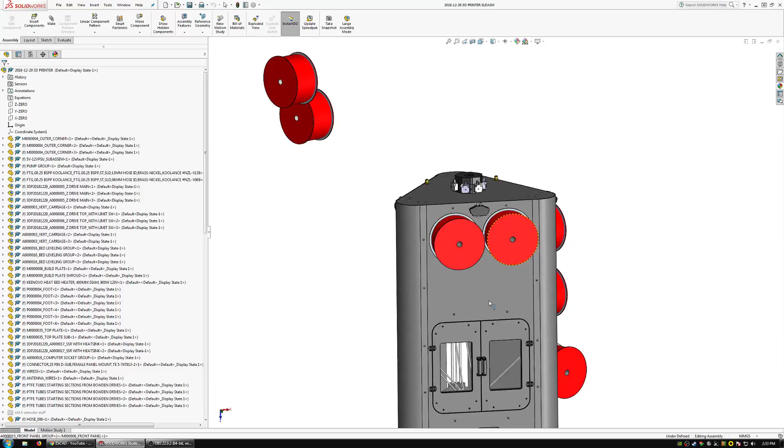Basically, this is a 3D printer I'm working on. I'll go over the features later, but the idea is that this should be a no-compromises printer that lets you create pretty much whatever you want to design—relatively fast, relatively reliable, without a brand name that makes it cost 10 times too much and uses DRM on filament. Not naming any names. This is going to be open source, and if I could get some community involvement, that would be great. If not, I'll just make it myself and open source it anyway.

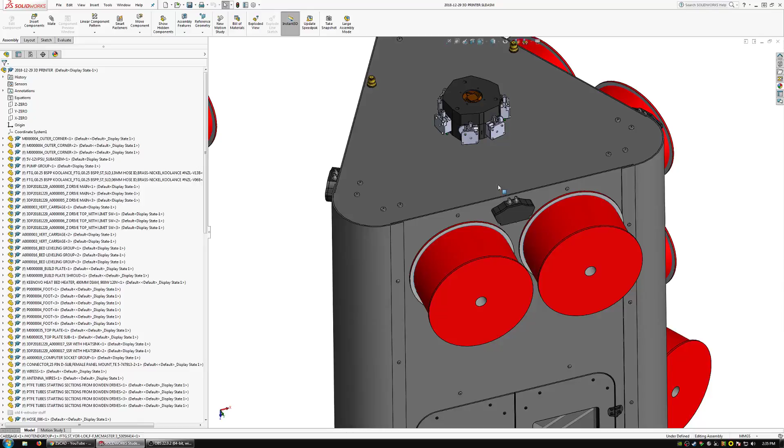Quick basic thing: this has 6 extruders, and inside we have a delta arrangement with 6 hot ends. So we can have 6 different materials—for instance, 5 different colors of ABS plus a support material, or a part that's ABS, Ultem, and nylon plus support material, and you're covered for some pretty complex designs. Even with just the color options, it allows you to design things and print them without having to paint features on afterward.

A lot of design has already happened here. Next step I'm looking at: we have the carriage with the hot ends, fed by this extruder group with the motors inside. I need to add some vents or something to this, but that can wait. Those feed from the filament-out detectors, which just have filament rolling through. Actually, I just realized this one is mounted upside down, which means they all are, so I'll have to adjust that.

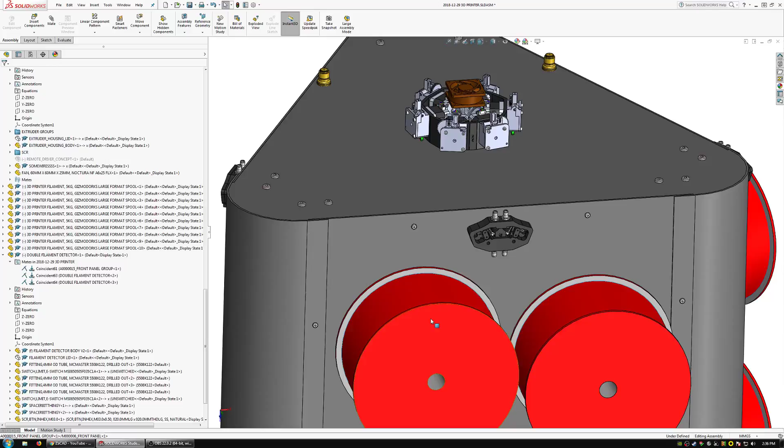It's feeding off these spools, but as you can see, I don't have anything for the spools yet. I've got an idea, so that will be what I work on today. First I have to put these in at least roughly where I want them, and that will let me figure out the spool placement. I just want this one parallel and the other parallel, with all the others facing the same way. Looks good. Since I hid some bits, I'm going to show them again.

This has 3 screws to attach it—I could probably get it down to 2 if necessary. I'm going to hide this, and I think the best place to attach it would be to put those screws right into there and tap this aluminum beam. Just have to see if I can get all 3 in there; this area is relatively low, but I might as well get all 3 in.

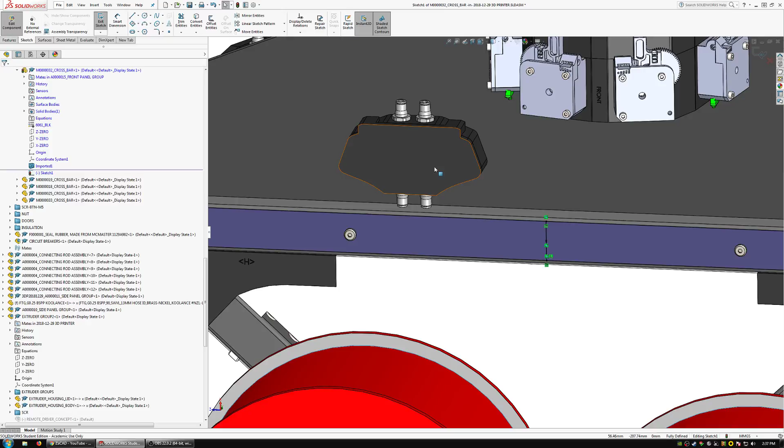I'll start a sketch over here and convert this whole face, so I can get the center of it. That dot is the very center. If I do a convert entities on the inner loops, then we have that pattern stored inside this part. So we can open this part and work in that sketch without everything else being in the way.

I'm basically just going to copy this pattern out. So I made a pattern that I can copy, and I can just do a copy.

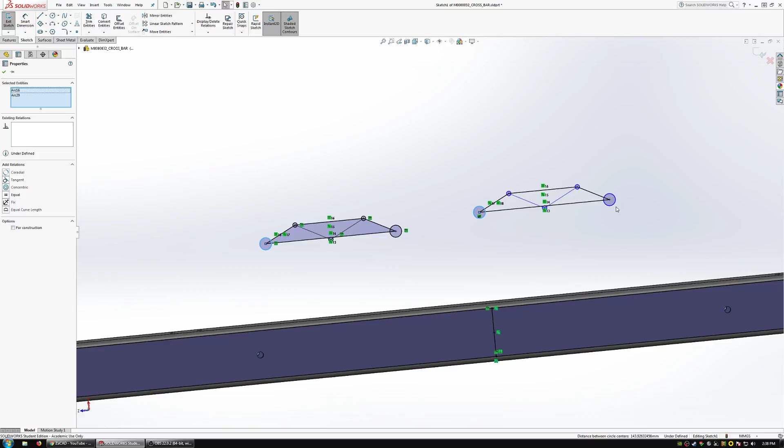Parallel, equal, parallel, equal—I'll just fix one point so I know when I'm done. It's going to be equals. What are these three? We want those to be smaller, but we'll make them all equal. For tapped holes, I just make them at the actual tap drill diameter, and I want those to be equal as well.

So that's fully defined. If I remove that, okay, now we can center that. I'll make a rectangle around it to figure out what I'm actually using here, with some tangent mates. That rectangle is the overall outer size, so if I do a midpoint right there, I just need to hide the rectangle.

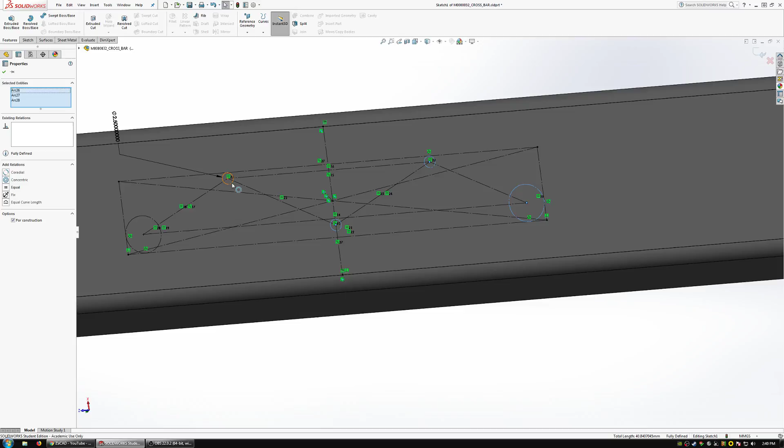For construction, I need to hide this, and hide that. At that point, all I should have left is these holes. Let me just turn everything to construction and select just what I want. Now I should be able to do a cut—10 millimeters, that clears. I'm going to break the external references, since they were basically just there to give me that pattern.

Okay, and now I've got that pattern on that beam. Now I've got two other sides, and they do have different part number beams because, while it's roughly the same all around, there are minor differences.

Just gonna completely hide the triple one because that was kind of a silly idea. It didn't really pan out because of trying to line up the filament in an efficient way. It just didn't work, especially if I want to have an enclosure around it to keep it relatively dry.

Okay, so I have this bar. If I just copy and paste it over here, looks like it's got the three holes from that last filament out detector with the triple one.

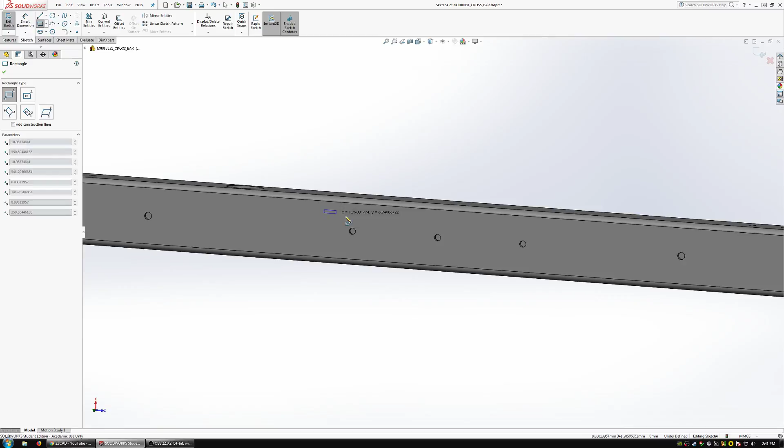So we'll just cover those up. And they're gone. I know that's very sloppy.

I don't care, it's my project, and if I'm ready to actually release this stuff, I'll go through and make it all good. But I find that a lot of times in design, you get so many changes and so many parts that you end up modifying over and over again, and they end up getting huge.

So it's just better to work with what you got. Don't really go back and fix things, just make it look right and the right size and dimensions and everything. And then when you're satisfied with it and it's all set, then it's time to fix it and make it look good.

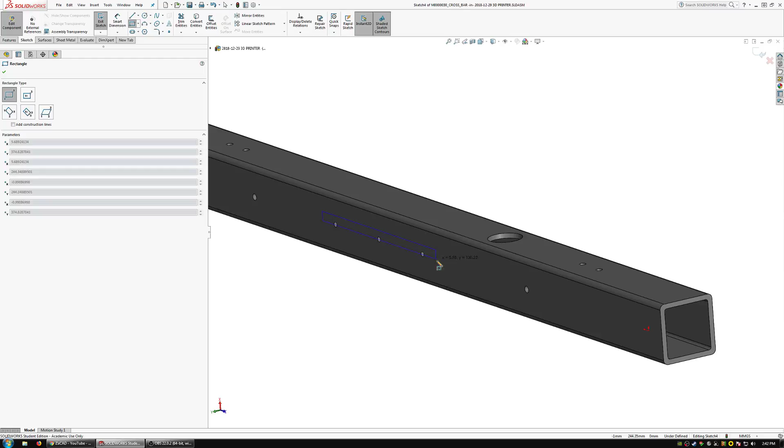Alright, so this one also has the same issue. Just gonna fill in these three holes. Okay, that's good. Then show this, and I'm gonna copy this one.

And just made it the same way I did the previous ones. These are all the same length, and I want this to be in the center of all of them. So I can do that pretty easily.

So even though I'm working this part, I can still sketch on this plane. It doesn't really matter at all.

I'm just going to cut up to next, and that should cut the pattern through. Yes, it did, but not up to that one.

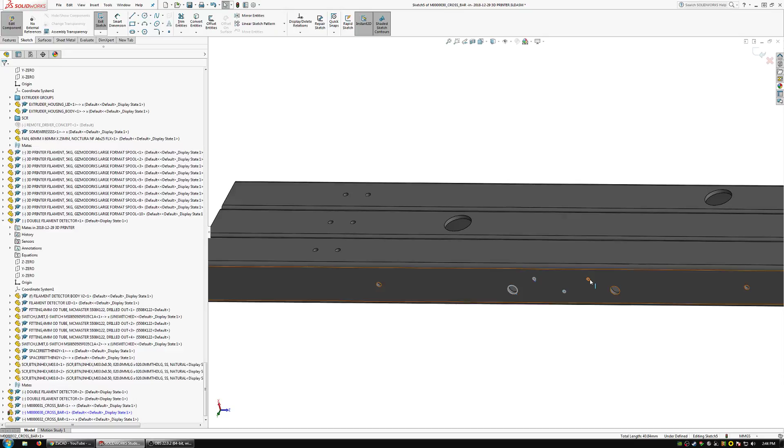Okay, and then I just need to edit this one. I'm going to do the same exact thing. To next, sounds good.

And then I'm going to break those references because it's just a pattern. And I like breaking references anyway because SolidWorks can get a bit choppy when you've got external references, and it really slows things down as well.

Alright, so we can get rid of these three because they were just there to transfer the holes. So now I've got the holes there, and holes there, all the same pattern.

Gonna show everything again. And I'm just gonna get rid of these so that they stop popping in because I am not going to use them. I'll just suppress them just in case I decide to change my mind later.

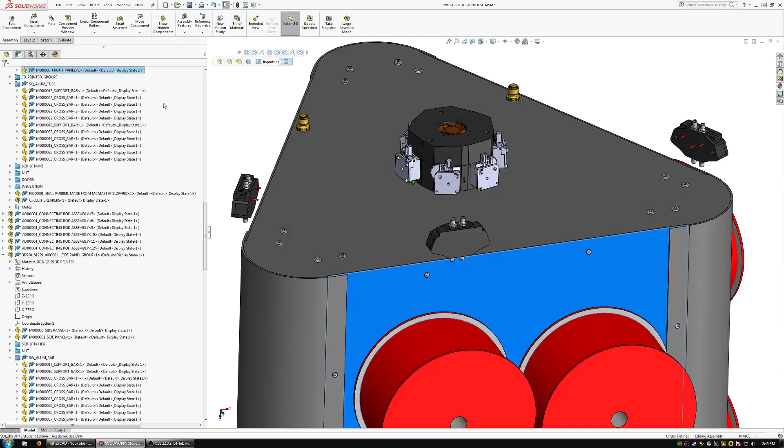At least when I show everything, they won't pop in again. Alright, so now I need to add that same pattern to here.

And how I'm going to do that is, actually, hide this first. Then create a sketch and go back to that, get those holes. Just going to convert them and do an extruded cut through all. And that's set.

Over here, I'm going to do this panel as well. Again, I've got holes to patch, so I'll just do those real quick.

So much easier than removing drill holes in the real world. And again, we'll just copy this sketch out of the cut, and through all.

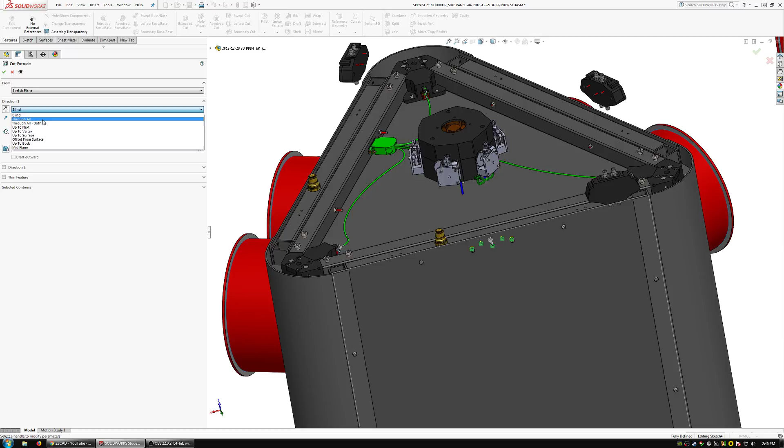Okay, one more to go. Alright, so that's patched. Then we just need to copy the sketch one more time.

Okay, gonna list all external references, break all. And just because that was a lot of external references, breaking and all that, I do a Control Q to do a full rebuild, and then I save. And save.

Alright, so now I can start attaching these. And that's fully defined, good deal.

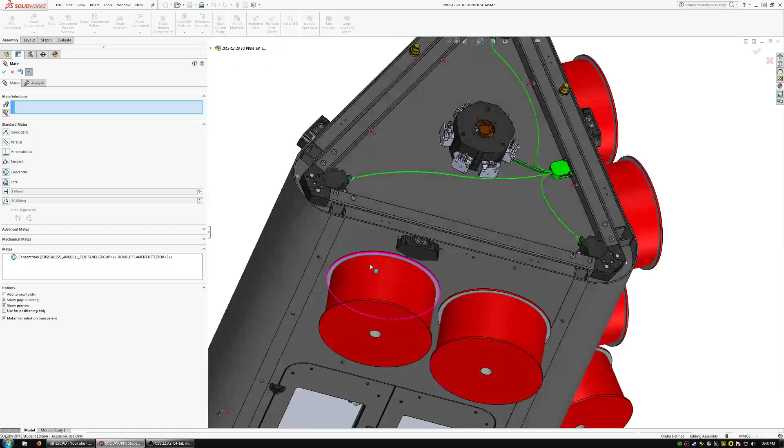Just kind of pull these off the edge so I can actually get at something to mate. And there we go. And one more.

Okay, now one minor issue I just realized is that those holes we just made are at tap drill size, which is fine for the side, the parts that are actually supposed to be tap drilled. Actually, we don't want to hide those.

Edit. Okay. So, just gonna hide all the filament detectors.

Okay, so then I can go in and change this to be 3mm holes here. So these are just through holes. That way I'm not trying to thread into a panel.

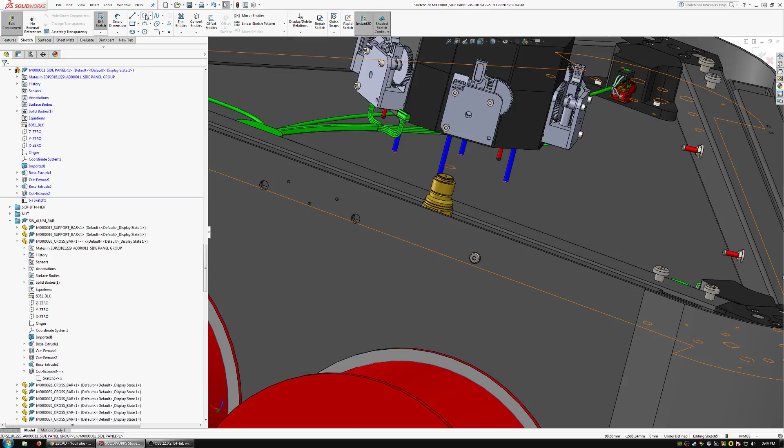And yes, this will break some mates, but yeah, we can make them again. And sure, I could just modify the sketch, but this works too.

And yeah, when this is all ready, it's just going to be step files anyway, so it doesn't matter how they got there as long as they're right geometrically. And one last set to expand.

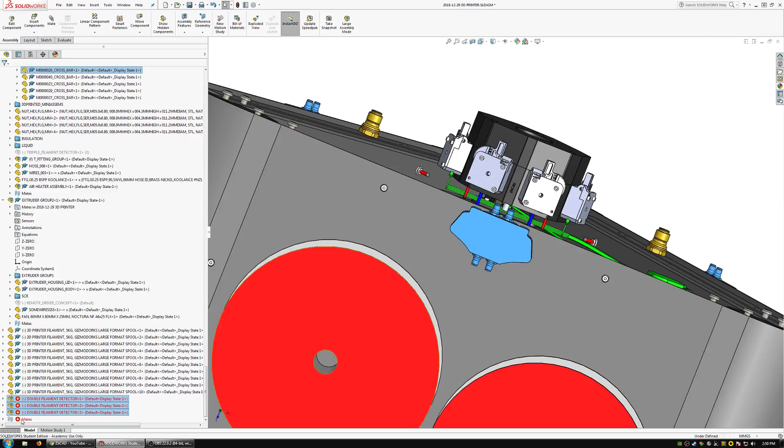Okay, let's show these again. Okay, there's the mate error that I was expecting. Just delete those three, and we have to redo those mates again.

Seems like an annoyance in a way, but at the same time, by doing this as you go, you save yourself a lot of coming back later and going, oh yeah, those holes didn't quite line up. Now I've got to redo that panel that I've already made a drawing for.

Okay, so we have our 3 filament detectors. They're in place, and go back to showing everything, and do a force regen and a save again.

In SolidWorks, in any CAD software, you should save a lot. In SolidWorks, you should save an absurd amount. Not to bash SolidWorks or anything, just you really should.

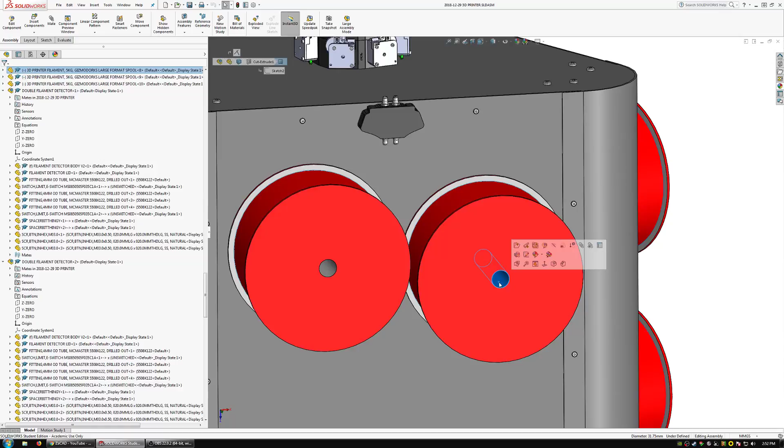Okay, so next question is how to support these filaments or these filament spools. Some machines support here, and some machines support at the bottom, and each has their advantages and disadvantages. In this one's case, I am going for middle support just because it's a little bit more secure.

Basically, if we have a middle support coming out through here, and we have some kind of clip-on, screw-on, whatever device at the end that keeps it from coming off, you can move this around the office. You could even ship it with filament. Not that I'd recommend that.

Whereas if you've got supports at the bottom, it's possible that might actually pull off if you upgrade your stepper motors. So I'm going to go with the center support on that.

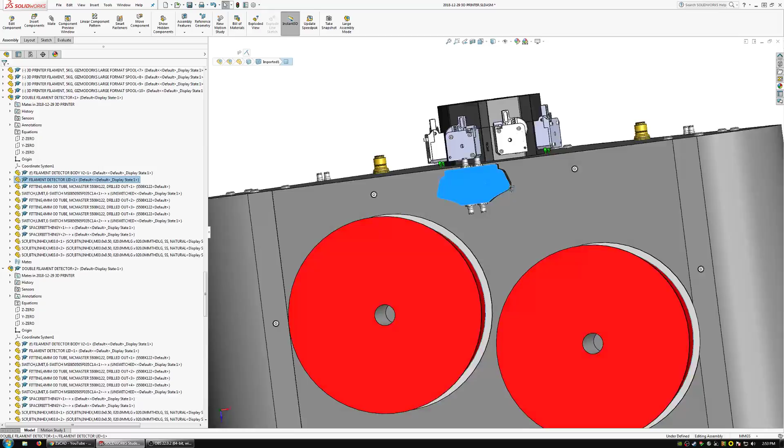Also, these eventually are going to have a shell around them that's sealed, and because of that, I want to minimize their space that they're using and also move it up so that it'll tilt down from there. I'm gonna have to modify this cover to be a little bit more square so that it can just kind of fit around that.

But yeah, okay, so these are basically some of the biggest filament spools that are out there. So I'm not too concerned with someone using something bigger, because these are already relatively large 5 kilogram spools.

But just in case they do use these and things are a little bit off here and there, I'm gonna put say 10 millimeters between them, which isn't much. So that'll work, or it should anyway. We'll see.

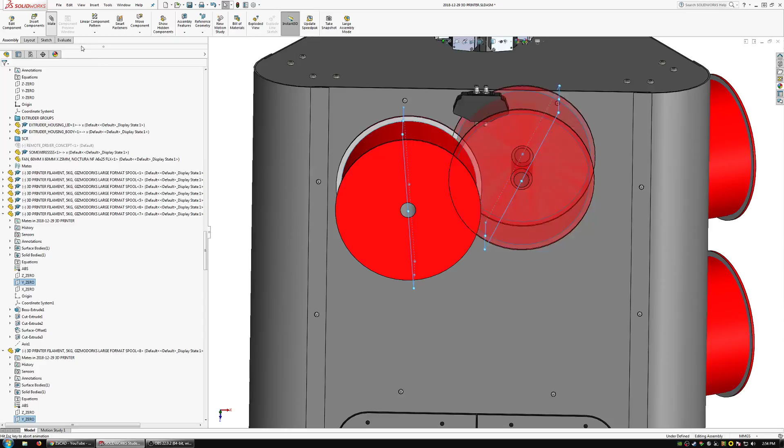And I am also going to make these... ooh, is it this one? Okay, make these coincident, and then I can rotate just a little bit. And if I make that parallel...

Okay, so now we can at least sort of get an idea of where everything is. Now, this panel isn't going to be strong enough to support the two 5 kilogram spools. But if we hide it, and I already have this cross brace behind there, it looks like we're just about perfectly on there. I mean, yeah, that would be acceptable, right?

Okay, well that works actually a little bit more wonderfully than I was expecting, so that's great. So I'm just gonna make a sketch inside the assembly context, and yeah, it warns me, of course, because they're not useful for making features, but they are useful for positioning things and then making features based on that.

So I'm just going to try to make something that will automatically center all of this. I don't want to actually use any more dimensions than the ones I already made. Everything else can just be driven off of everything else.

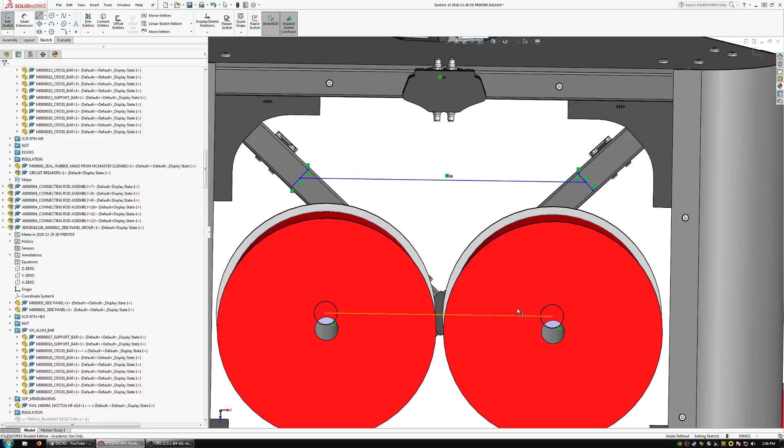All right, and equal. All right, so those points are the center of these. I shouldn't have Control-A'd, that was a mistake. But okay, it didn't crash. Wonderful.

All right, so yeah, I'm gonna exit this sketch, and I'm gonna edit this part. And I think an M5 should be more than enough for this.

Actually, was it M5 by 1? I always forget those, I'll just pull in a screw to find it. Yeah, make it a button head. So that is a 4.2. All right, 4.2.

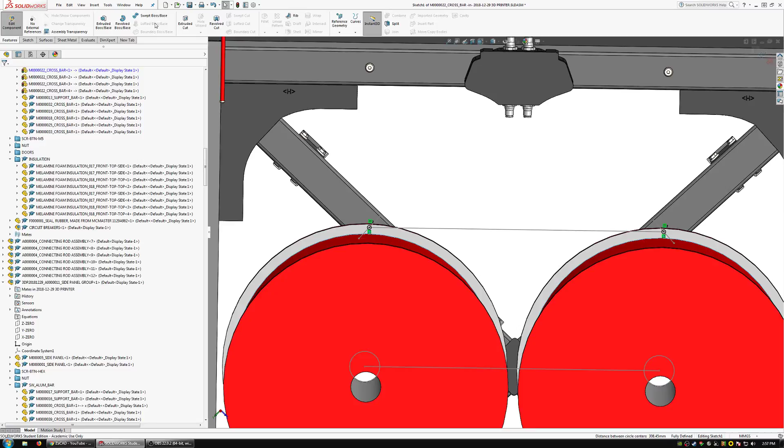And same thing over here, even though it's a different part. And I just want to go up to next. Select.

All right, so there is a hole there now. Okay, beautiful. And I forget I have a hole here on my own. Nope, I do not. Actually, see, this is 22. This is 22. Are these all 22s? They are all 22s, so I'm going to have to change that as well.

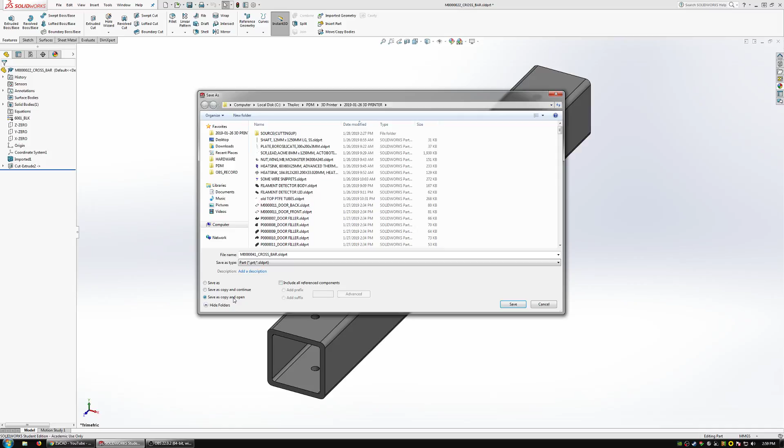So I'm going to do a save as on this. See, 30, 41. Save as a copy. And then I'm going to delete that last feature I just made because I don't want it on these. So I'm going to select these two that I don't want to change and give the new ones not all instances, just want those two, and check, and it reattaches all the mates because of the same part, same feature IDs and everything.

And then we need to wonder why this one is wrong. I might have it rotated 180 degrees or something. Before I fix that, I'm going to break this link because rotating that around is going to mess with that sketch. And then I don't need the sketch anymore. And I can move these down.

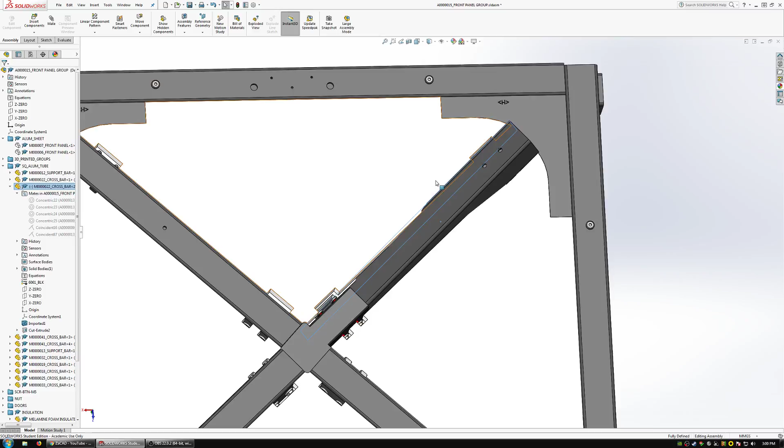Oh, then I have to figure out why. I'll basically just suppress all these mates, and yeah, that'll probably work. I'll just open the assembly that it's actually in, save some trouble. So I'm guessing that on the other side, yeah, there's the hole. So I just need to suppress all the mates on this part, and then I can rotate it around so that it's correct. And then I have to recreate the mates, but that's okay.

Just checking on the stream real quick. Alright, looks like no one's watching. Wonderful.

Okay, that's fully defined down here. So I'm going to show everything. And I'm going to edit this. Now I want to see something that's below that, so I could just hide the body. And I want those two, convert those up. And I want to show the body again.

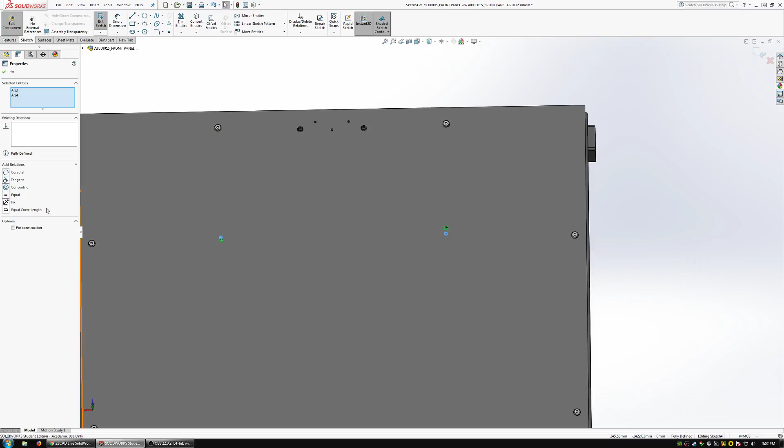Then we need to make two 5mm holes in the same location. Just if anyone's ever wondered why something has some really weird dimensions for it, well, it's most likely because someone's using a method like this, which just gets you the ideal dimensions, not necessarily something that's going to be nice and round.

Do an extrude cut through all. So that's 8. That's not the one I was looking for though. That one is what I'm looking for. That's 5, good. And that's 5, that's 4.2, great. Let's break all references. And I'll show with dependents also. And save it. Okay.

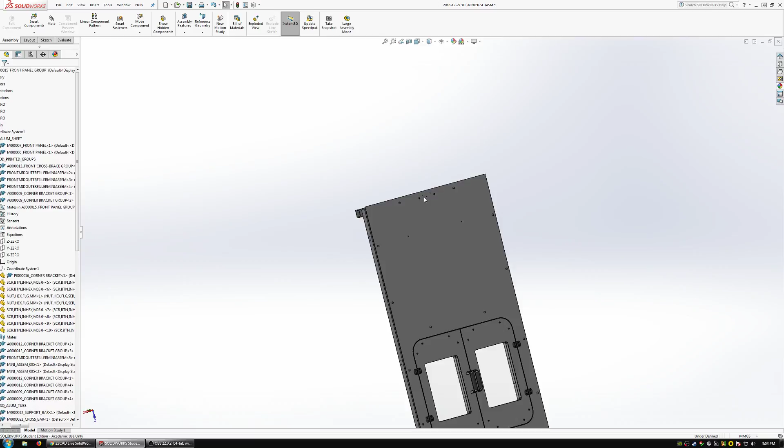And we can show everything in here again. Alright, so now I need something in the long bolt or similar category. So I've got an M5 here, and those pretty much top out at 100. Let's see what else. These are the hardware I've got here, stuff I modeled up based on what's reasonably available and reasonably affordable. So there's a lot in here, but some of the really large, long sizes, oddball stuff is not, because it's not the kind of thing you can just go and find wherever.

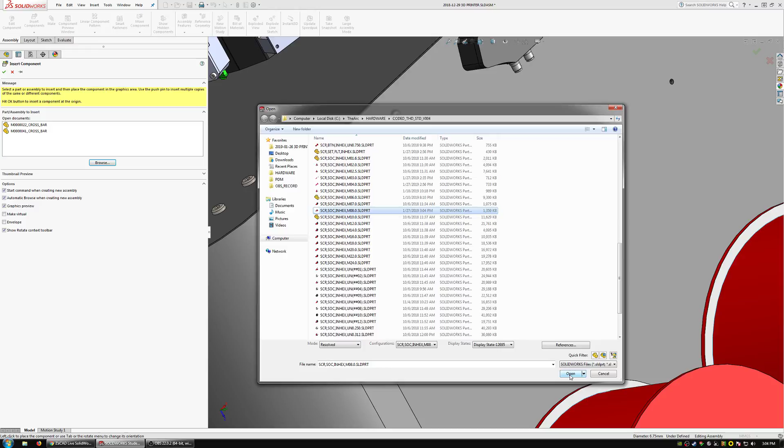All right, so that's pretty much close to the same. Let's try a socket cap. Try an 8. And how big does this go? That goes up to 240. And it's in black, so, see how 240 looks if it regenerates. Yeah, I'd say 240 is probably long enough. Okay, so we don't need these.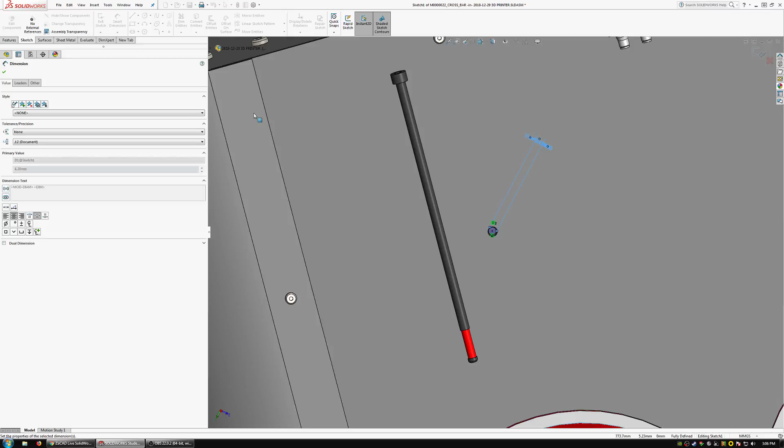And SolidWorks is back. And we need to adjust these holes. So this last sketch, I made this 5. I need it to be 8. Okay, yes. And then in this part, let's make this, what's 8 by 1.25? I believe so. Okay, yeah, I got that.

Alright, so if we save, save. Saving can take a while. Alright, and this will probably not be the ending length, but we can start from it. And just drag it out. Okay, so we need some sort of, well, do we? And I suppose we could get away with just dragging it on the bolt, but it seems a little bit less than ideal.

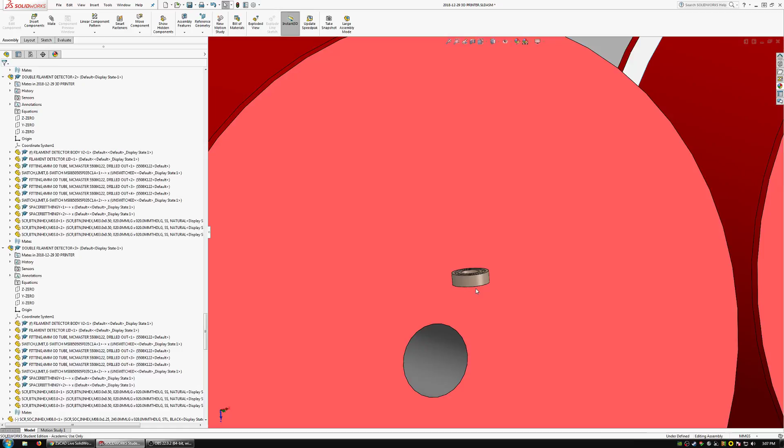Let's see what kind of bearings are common and from someone I like and relatively affordable. So this will be an axial bearing, and yeah, might as well just go with that. I guess that's what I've got here. It's at least a good starting point. So 8 by 16, 8 by 22, or 8. Alright, so 8 by 16 by 5. How big is that? And I always like to do a regen after putting in a family table part. Okay, so that is 16. Alright, so at least in that reel, it's plenty of room, because we've got 16 versus 31.

So, yeah, that'll do. Let's mate that up to here. And just to be thorough, we'll put one of these at each end. Okay. And let's see. Guess we're gonna need some kind of a sleeve that the filament could ride on. So make a new part for that.

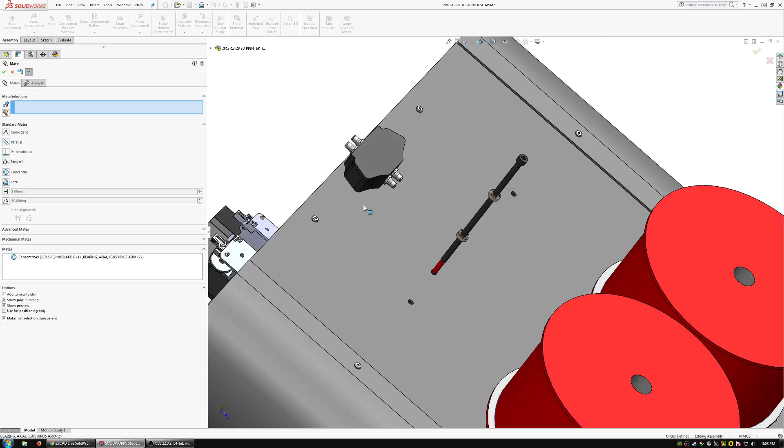Let's see. So we want kind of a back side to keep it from going in and rubbing against this panel here. And we want it to be large enough to go around the bearing. So let's start just converting this.

This part is, at least in prototype, going to be 3D printed. I want, if I can, to get about 6 millimeters. So how big is that? That's 28. I have seen spools smaller than that, but they're pretty rare. Let me try another spool I have here.

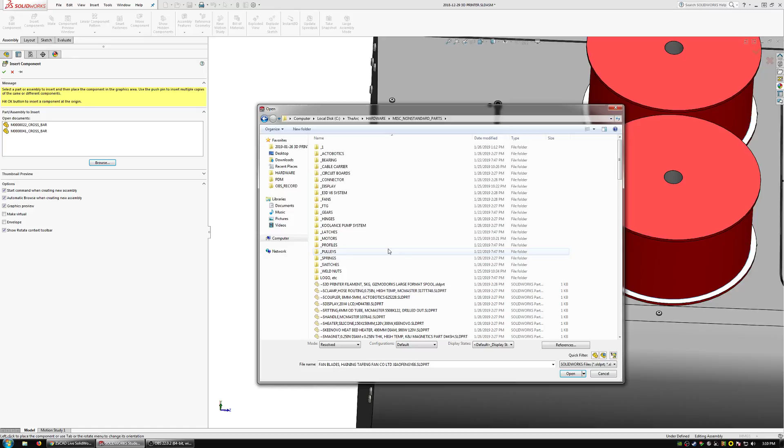Let's see where this is saved. Saved as 3D printer filament, but nothing else in there is. I could have sworn I had a 1 kilogram one somewhere, or a few of them anyway. But yeah, I'm happy enough with this. We can always modify this later if necessary.

Well, saying that, I'm just going to drop down to 5 right away, which gets our outer diameter to 26. It's just a hair over an inch also. So yeah, it should be good.

Okay, so is this currently coincident? It is. All right, well that's handy. Go back to edit the sketch, and we want up to there, basically. That'll work for now, you can always extend it later.

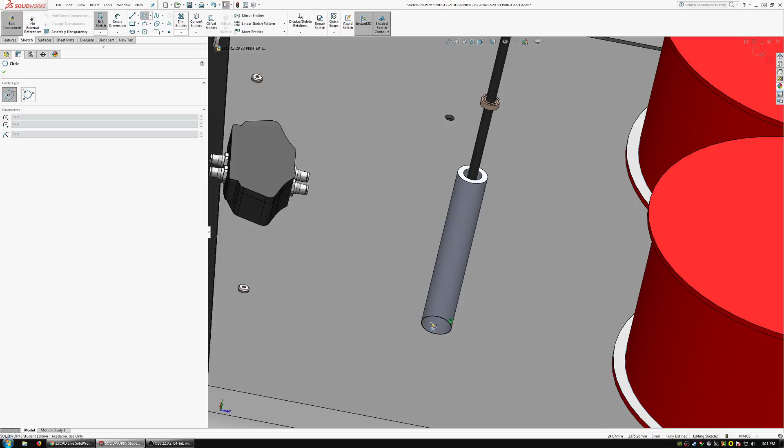And then I want a backside thing. So, 100 millimeters, nice round number. It's pretty unlikely you're going to find a spool of filament with something larger than 100 millimeters.

Try 6, that works. All right, so that needs to be 6 more. And this is 5 millimeters.

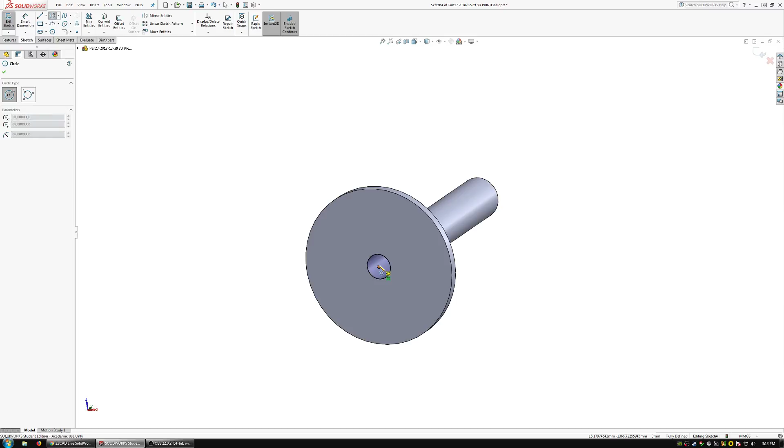So if I open just this part on its own, I'll sketch here, copy that, and make it a little bit bigger than the shaft. I want to offset this by 6 millimeters the other way, and there. And then I want to offset by 6 millimeters. That way it makes the tube a little bit more solid and gives the bearing something to rest against.

Alright, and then we can break external references because I'm going to start moving this around, which also means I need to float this. Okay, so I will mate to that and put in the bearings. And there we go.

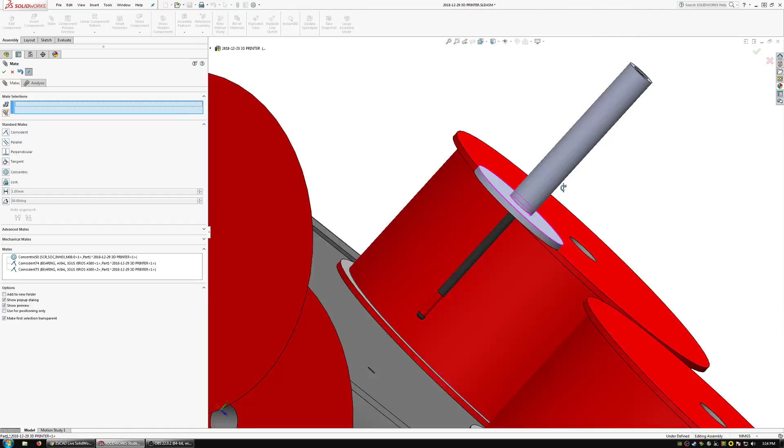So then I need another spacer right there. Oh, did I make those offset 6? I sure did, didn't I? I will change those to 5 and 5.

Okay, that looks better. Now I need something here, just make a new part there. And come on, okay. Actually, could I just use a washer? I could just use a washer. I don't need to design a new part for this.

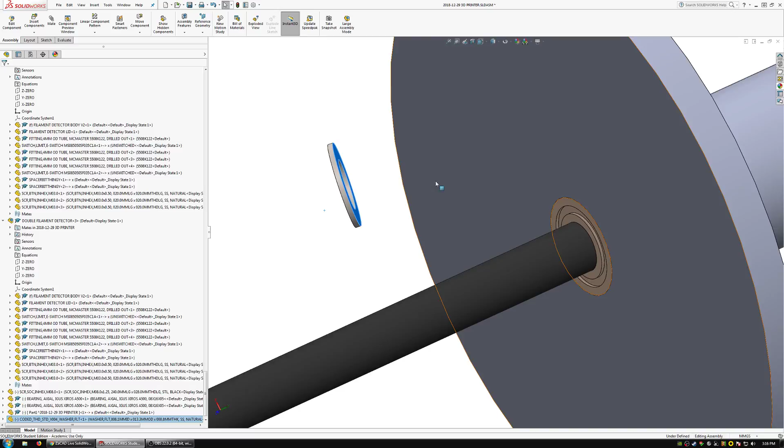Let's see what we've got here. Let's see what that looks like. So I want to keep it under 13.3, 13. It would scrape a little bit, but I know the actual part will be a little bit filleted, this will be a little bit filleted, so I think that will just barely work.

Beautiful. And just because these can potentially be a little bit wobbly, I'm going to double that up. Let's see, this one is 0.8 millimeters, so 2 of them is 1.6. That should be enough.

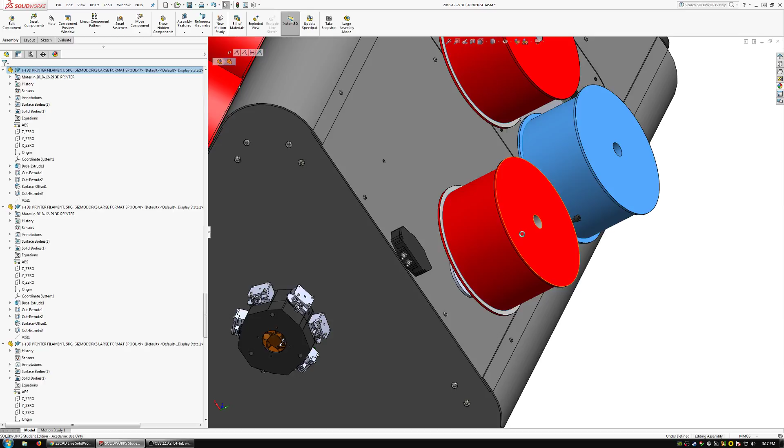Okay, so now we can mate that to the surface it's just going to be against. Wonderful, and I'm just going to make another copy of this one in case I need to use those as they are for some reason. That's not what I wanted to do. It's okay, there we go.

And mate that there. Okay, so that looks alright. We need to have something to attach to. And how would we do that? First thing first, this is just going to be right against there, just tightened up right against that bearing face. It should be fine. And then this needs to come out, or it needs to be more.

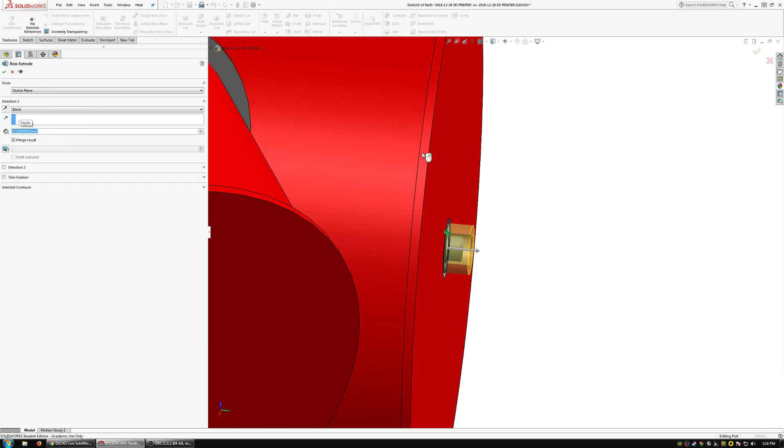So I'm going to sketch there. I'm going to convert the inside, convert the outside, and extend that out by, let's see, I want 6 and 6, so let's go with expanding that out by 13. And then I'm just going to open that part, change this so it's not merging it, just so I've got a handy little line to work with here. And, yeah, hide this for the moment.

And I just want to have like a little groove that I can use to mount something in. If I make it any bigger than the rest of the shaft, I might as well make the rest of the shaft bigger. So it has to be going the other way, and 1 millimeter. Yeah, we should be okay there, but then this has to be, I have to bump that back up to 6. That's fine.

Alright, edit this sketch again. Edit it and convert it. And then I want to show everything. I do a cut that is 6, actually I'm gonna make it 6.5. Okay, then I can combine those.

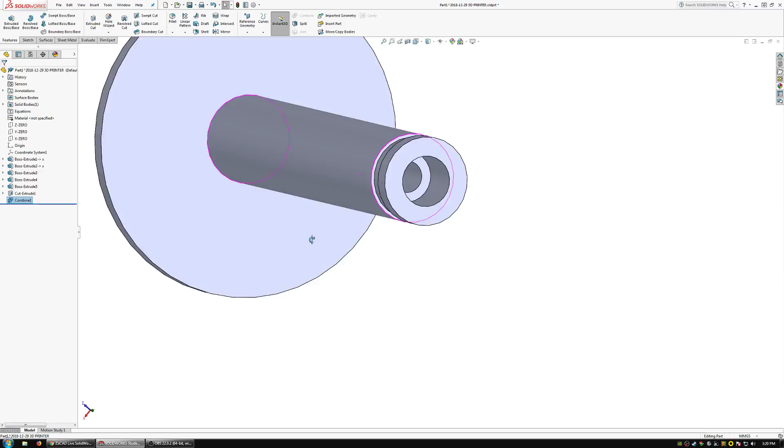Alright, so now I can just make some kind of clip thing that slips over that. I want to make that as a separate part, just so I don't have to split it off later. So this can rotate, but other than that, it can't really get out of there.

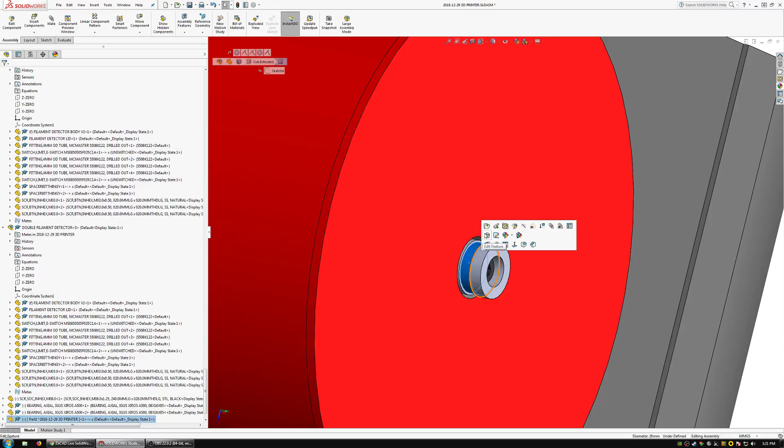Actually, come to think of it, I could have several of these lined up along the way with clips that would go in. That'd be interesting. If the clip could be laser cut, just use some cheap ABS, design a little flat panel, and go a little bit thinner with the graduations. So still want, say, 12 at the end.

And then just get rid of the combine, get rid of the cut. So, let's see, if I offset a plane by, say, still want 6 as the final one, and just copy that. Cut, and so that's standard 1/4 inch - which I'm in the States, so that's what's available - or 1/8 inch, sorry.

And I'm going to put in another 0.1 for filament or printer inaccuracy, and another 0.1 for not swearing while you're putting it on. And we got that.

Okay, so I'm gonna rename this first as... okay, I'm gonna hide this plane because I don't need it anymore. I'm just gonna hide that as well for the time being. And I'm gonna combine these.

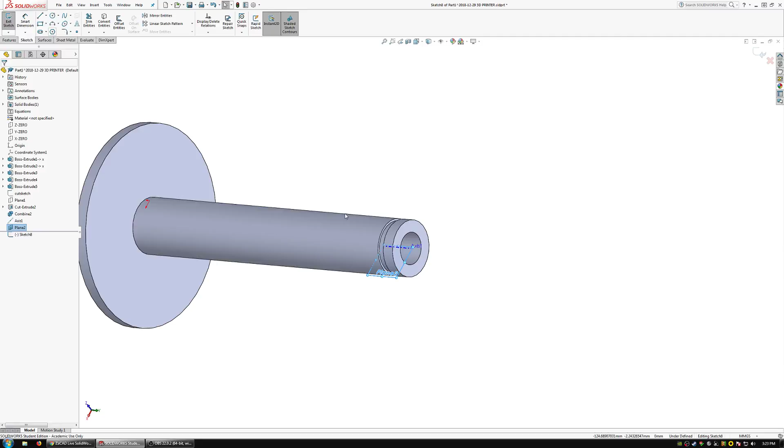Okay, so put an axis in there and put a plane. Oh, not that one, try that one. You're happy about that? Good. So then if I do an intersection curve, that'll copy all my lines, and then I can just hide the body. And I don't need any of that side.

Good deal, so now I can just kind of create a pattern of this, which we'd want to go like that. So, yeah, just those - we want a linear pattern along. I don't have a solid feature. For some reason, linear sketch pattern only works along solid features and not sketch entities, which is kind of annoying.

Alright, so what if I just, on this plane, make that? And that's collinear, that's parallel and equal, that's perpendicular, and yeah, just make sure it's fully constrained. Good enough, I don't want to merge it, just a reference for my sketch.

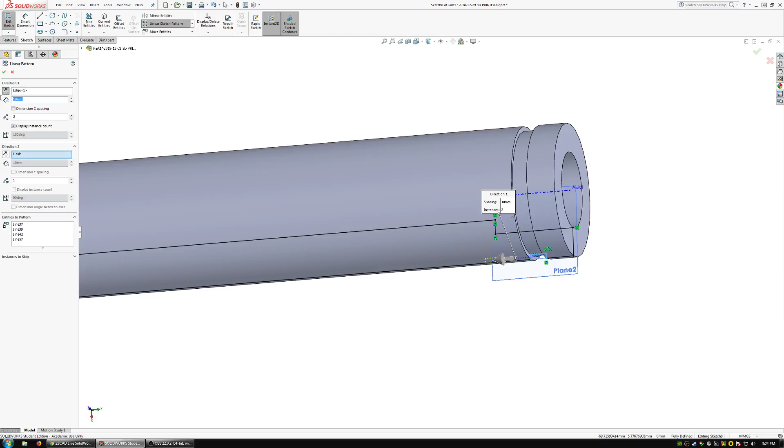Okay, so I can do linear sketch pattern and along that way, but I want it to go the other way, and I want its spacing to be - oh geez, I don't even know - but we'll make 10 of them, 12, 13. Yeah, if you got smaller filament than that, I'm sorry.

Alright, and then between them, I want 4? 3? 3 works. Okay, so maybe I should have made that more, but I can say 20. Okay, so that should do there.

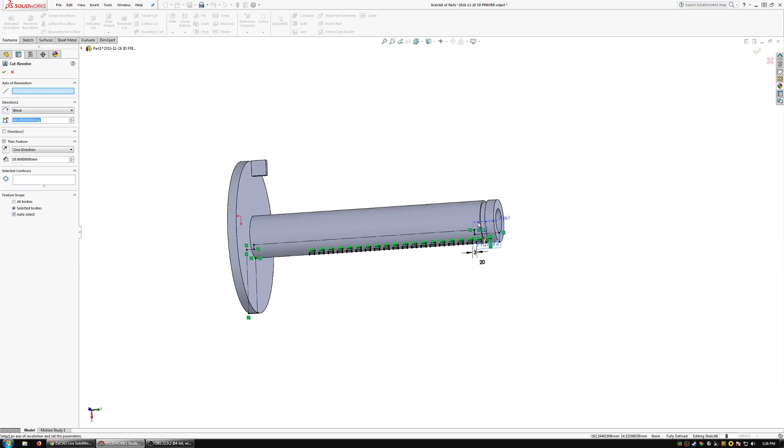I'm just gonna make those for construction, make those for construction - it's already for construction, and that's already cut out. Might as well leave it. So, alright, then I can do a revolve cut around this axis with these - no, don't want a thin feature.

Yeah, I must have forgotten to make something for construction, but that's fine. I'll just pick all these manually, I guess. Okay, that works. And then I don't need this body anymore.

Good deal, do a control Q - anytime I delete a body, I do a control Q because it freaks out sometimes. Alright, so there's our shaft that you can drop ABS locking plates onto. And I like ABS because it's kind of flexy, but also kind of strong, and most importantly, cheap.

If you look at some of the other materials in here, that's clearly not the most important thing to me, but it is nice when you get it.

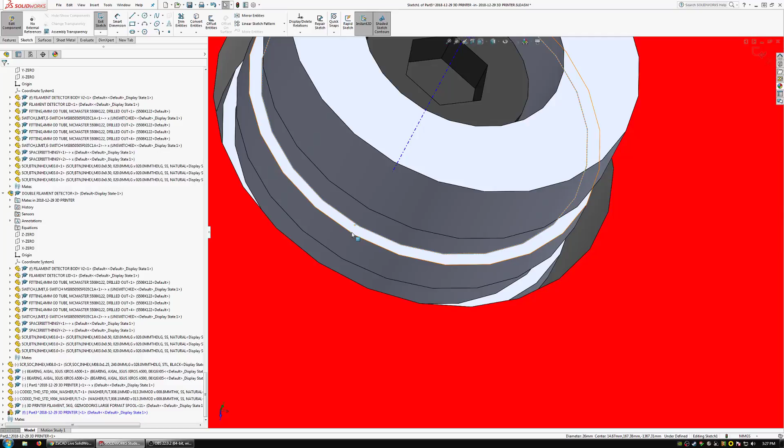Okay, so I'm going to create a new part, and it's going to be a little clip, and it's going to go right here. So I'm going to convert that, and make those concentric, and yeah, it's ABS, it's cheap, make it 10 millimeters.

But we don't want a complete thing, we don't want a complete circle. We want a partial circle, but we can work with that.

So if I make this a cut - I don't know what horizontal is, alright, we'll call that horizontal, it's good enough. Alright, so I want to go a little bit past.

I want to be bending out maybe 10 degrees, they're about - okay, so this is perpendicular, so that's a straight. And if I go like that and like that, I get those parallel.

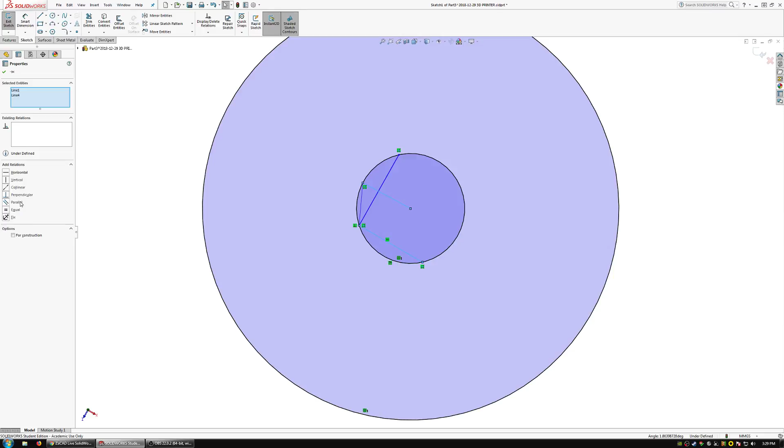And then I measure this, or I set this to be 10 degrees. 10 degrees isn't much gripping. Let's try 15. 15 is a nice solid grip. Okay.

So I want this, and this, and this. Alright, and then I want basically a straight cut down to there, and perpendicular.

Okay, so now if we make this ring, okay, it looks all right. Do I want to go just a little bit more? Yeah, I feel like that'll work, and if it won't, well, we can always go more later. It's not a big deal.

Do I want to fillet it on that edge? No. It may fillet itself over time, but no, I don't need to fillet it on that edge at all.

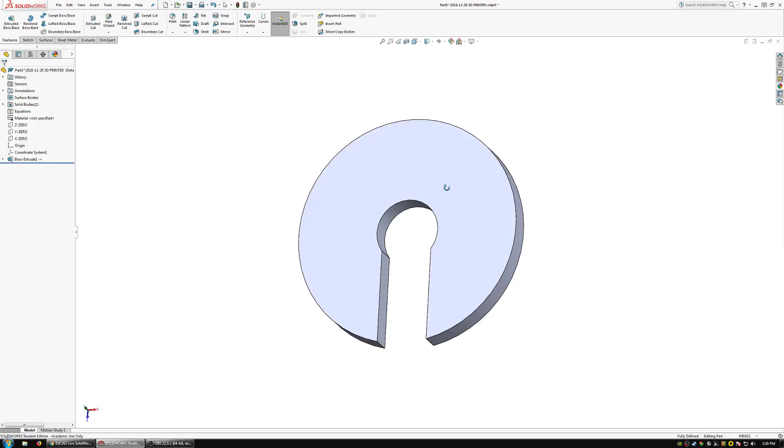Okay, we do want fillets down here though. Pretty big fillets. 20? Too big. 15? 15 works, I think.

Alright, and now I need some kind of way to get my finger in there so I can get the stupid thing off the device. Which can just be a slot, I guess. Ooh, I can use a curve slot. Alright, not often I get to use one of those.

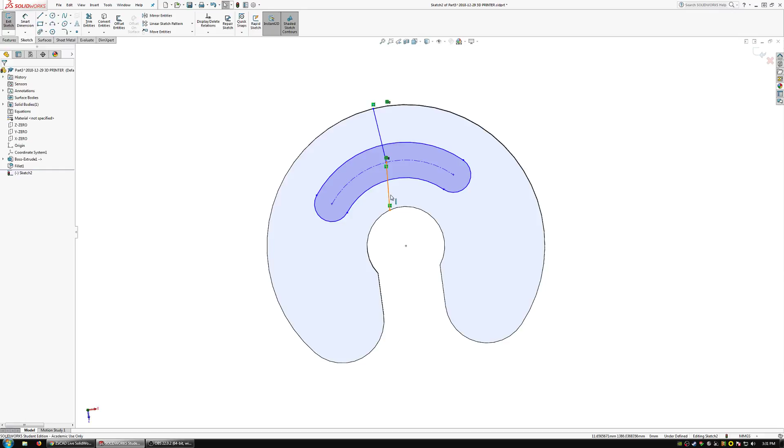And if I go from there to there, and there to there, and I want those to be collinear and equal, I want to be coincident with that, and I want it to be parallel with that, and it's fully defined. Okay, hide, return those to construction.

I suppose I want 5-ish millimeters. 6 millimeters, 8 millimeters, and then so that's a 20 millimeter opening. That's a good size opening to stick your fingers in.

And how wide should it be? Probably not that wide. Let's see. That can work.

Set this to ABS. Looking good. There's nothing in there. And let's save it to an external file as well. That'll work.

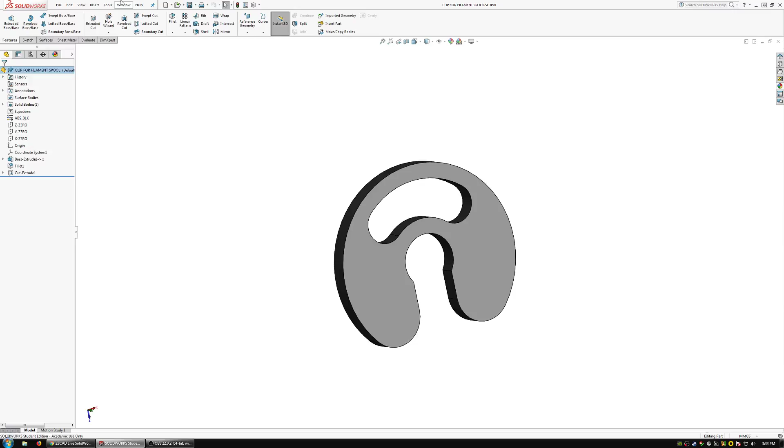Alright, so if I go back to here and close that, and we can close the crossbar, and we can close the crossbar. Just like to keep those things closed, save windows.

And okay, so I don't have any external refs. Good.

And I'm gonna float this. So, right, how thick did I make that? I made that 10 millimeters, so we want this to be...

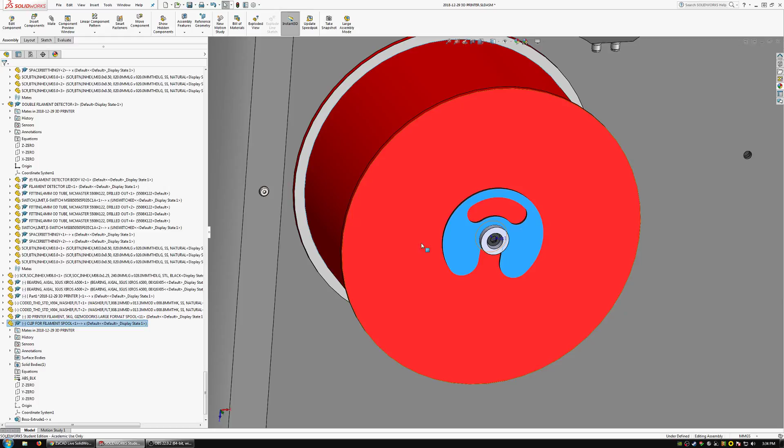Just to be clear, I'm not a big fan of using inches, but I'm in the United States and getting 3 millimeter material is tough. When you do get 3 millimeter material, or when someone's selling it as 3 millimeter, a lot of times it's actually 3.175 because that's eighth inch. And interestingly, from China, I've gotten the opposite, although there's never any way to be sure the next shipment will be the same as the last. But I've had stuff that was sold as 3 millimeters, and I got it from China, and it was 3.175, which is eighth inch, which in theory China is on the metric system, but I guess they make a lot for the United States too.

So, all right, so this clip is good, but I just, yeah, where the planes are, that's no good. So I can rectify that pretty easily.

Make an axis, and then where's Z? Z is far away. Okay, and so I want this to be with the axis, and I want this to be with the Z. Okay, and then I want... where's Y? Let's see. Yeah, I'd want X to be parallel with that.

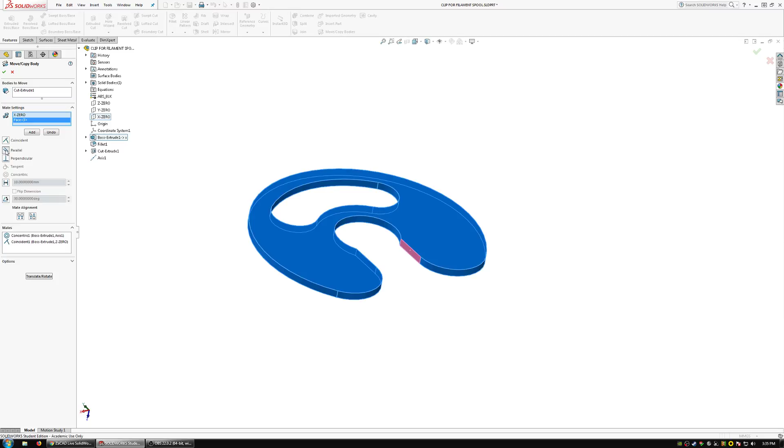Okay, so now if I go normal to, it actually looks correct. Do a Control Q, I save it, and when I go back in the 3D printer, it'll be who knows where. But hey, what do you know? It stayed. Oh yeah, it stayed because of the mate. Great, awesome.

And then we'll do a parallel to there just to make it look nice. Okay, so I feel like that's a decent enough system. So that will just rotate along with the whole filament spool holder deal. Yeah, I'm happy. I'm pretty happy with that actually.

You still have an axis showing? No, you don't. Something else does. Oh, we'll sort that out soon enough.

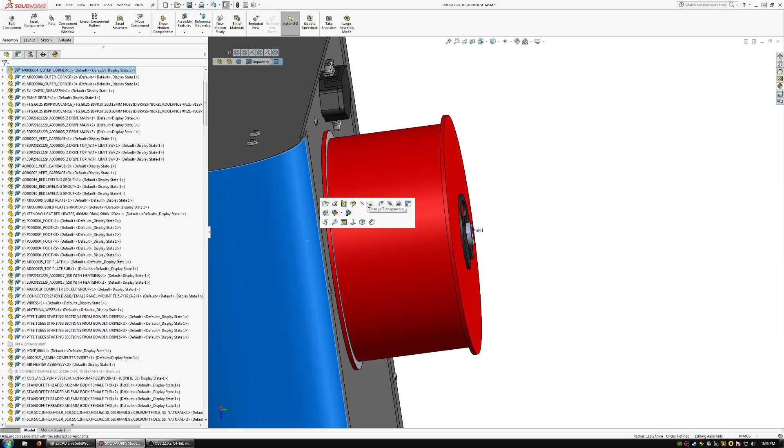All right, so just like that, we've got a filament setup, or a filament spool holder. So get that. Two washers. I should probably look and see about that screw. So I'm guessing that it's far too long. Yeah, it's going clear out the other side. Let's see what a 200 looks like.

It's processing. Just hide everything that's in my way. I can bring it all back later. And hide all that. Lots of stuff in my way.

Okay, so that looks pretty good. It's that 180 millimeter, black oxide. It threads in there. Do I want it to thread all the way through? I mean, it's got a lot on it. And it is high up, so it's not a big deal if it threads all the way through, but then I'd have to do it on all of them, and I don't know if I want to do that.

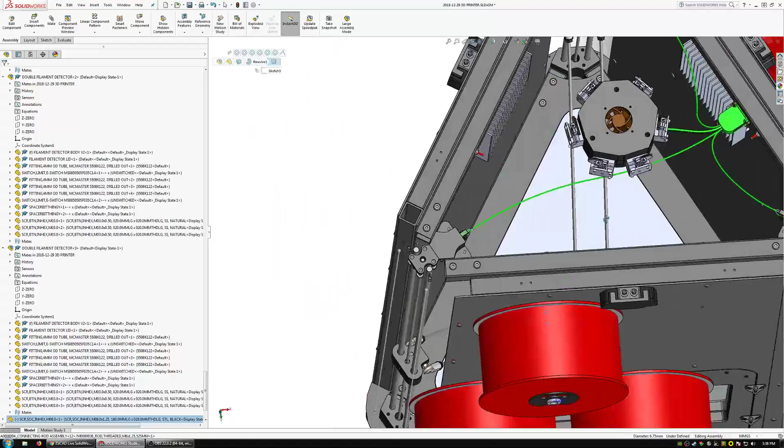It's pretty far in, so I can't put a weld nut in there. Can't really put a nut in there at all. How far in is that? Let's measure from there to there. So 145 millimeters. You don't want to stick a wrench in there and try, and you probably could, but just barely, and that doesn't look like fun at all.

But at the same time, I've only got 3 millimeters of thread for an 8 millimeter screw. So let's go back to it, see what a 200 looks like. Probably still not enough.

Oh, there's a problem too. Yeah, so these are only partially threaded, obviously, at this length. So, yeah, these are all 28 millimeter thread.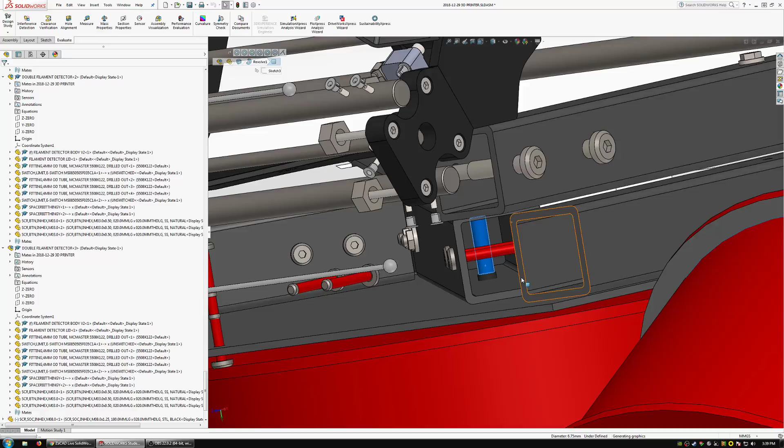So it'll be 180, and 150 millimeters. I know you can get a wrench that long and it's not ideal, but I'm not sure really how else to address that. So if I get a nut, I might as well get a good one that'll spread the load well. That's kind of frustrating, but I'm not sure what else to do with that.

On a serrated 8 millimeter, I might as well get stainless. Okay, yeah, that's why I always regen after I insert a library part.

That hole needs to be bigger. It's not going to tap that anymore, which is a plus in that sense at least. There's the hole.

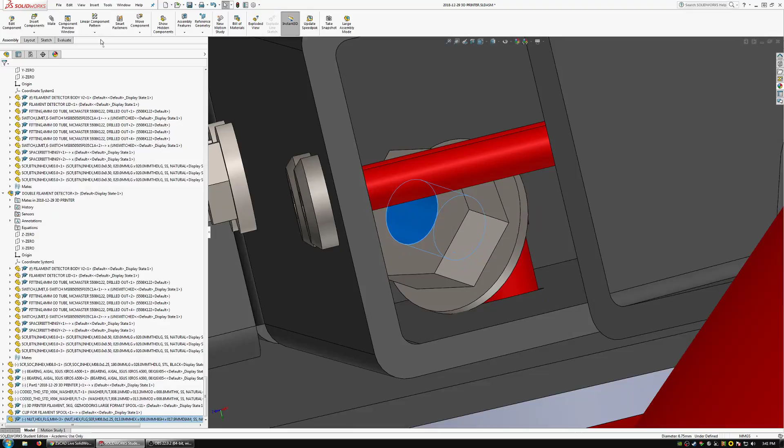All right. Where's that? Probably just hiding behind this, right? Okay. And mate to that. I don't like mating. I probably should have made it to the shaft, but whatever.

So, oh, quick little thing here. For my thread standards, I model this at tap drill diameter and this at nominal diameter, and this whole end section is 3 threads long, which the last 3 threads I find are not ideal threads. So I like to get past those, unless it's a blind hole, obviously. But when I can, I like to get past those.

So if I go to 200 millimeters, am I going to be into the next panel over? No, I'm not quite into that next panel over. So that's an option. But what about?

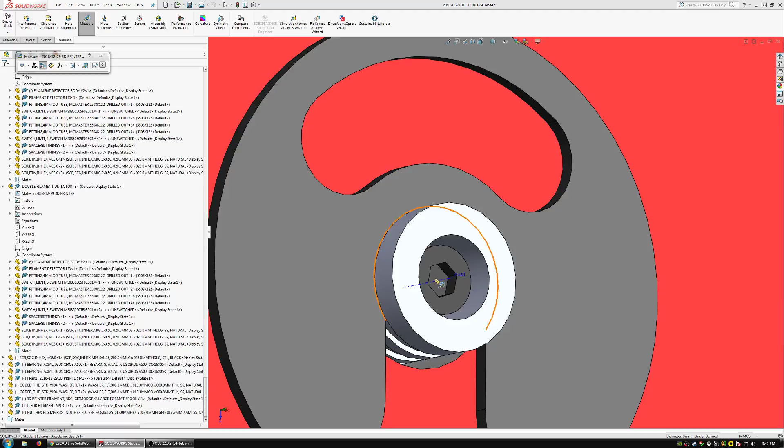Yeah, I'd like it out there. If anything, I might bring the screw out a little bit. No. 4 millimeters? Nah, that's fine where it is. And yeah, it's going farther in than necessary. Oh,

Yeah, that's a problem. So, did it measure? I don't think it measured. 4.72, or normal distance, 2.5. So if I bring that up 4, I should have clean threads, in theory.

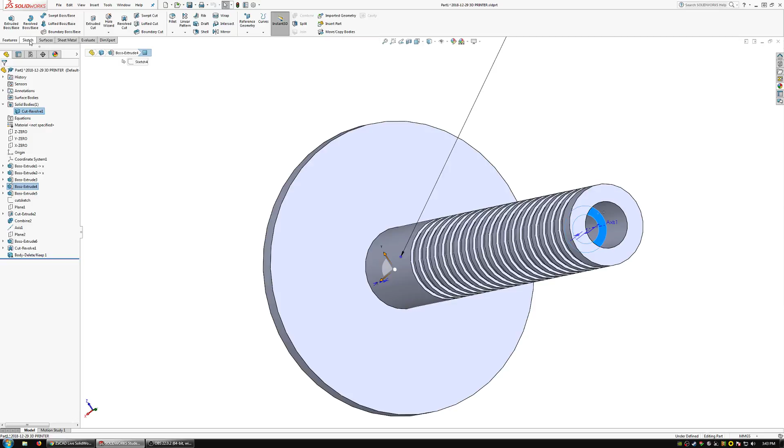Let's see here. Let's start by bringing this up by, oh, I don't know, 2. That way that bolt's still recessed a little bit. And I could make this a little bit thicker, but it's already 6 millimeters thick. Yeah, I could go to 8.

And then I can bring that out 2 more as well. And yeah, I know I'll have broken mates when I come back, but I can fix them easy enough. Okay, then I'm gonna hide that axis. And yep, that's fine.

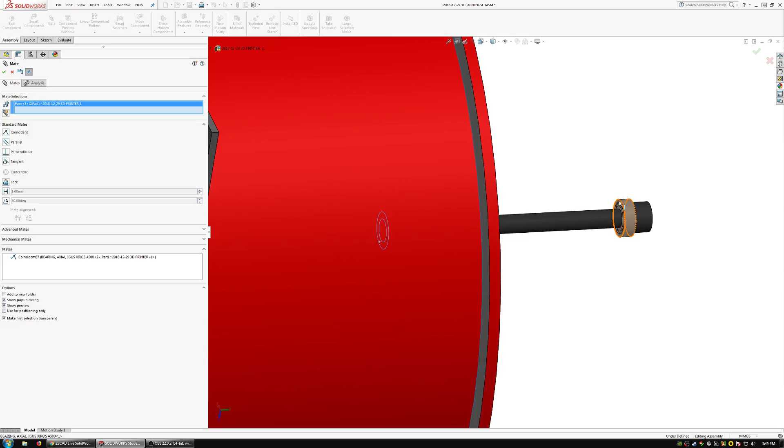Alright, and I need to make a new mate for that because that old face is no longer there. It's buried. Good, good. And if I just go down to my mates, got a coincident and coincident. 2. Alright, good enough. Good enough.

And so I should have the nut there. Alright, good deal. So I'm going to start putting everything in this folder. Filament, I want the 2 washers. I've got the part that I've just named parts so far. I've got the 2 bearings, and I've got my screw. I'm going to add all those to a folder. And then I'm just going to hide the folder. And just to confirm that, yes, everything that I want in that group is there.

So I have this part 1. I don't like it being called that. And no external references. I'm going to make this out of black ABS. And then I'm going to save it. Filament spool shaft. That'll work. And go back there.

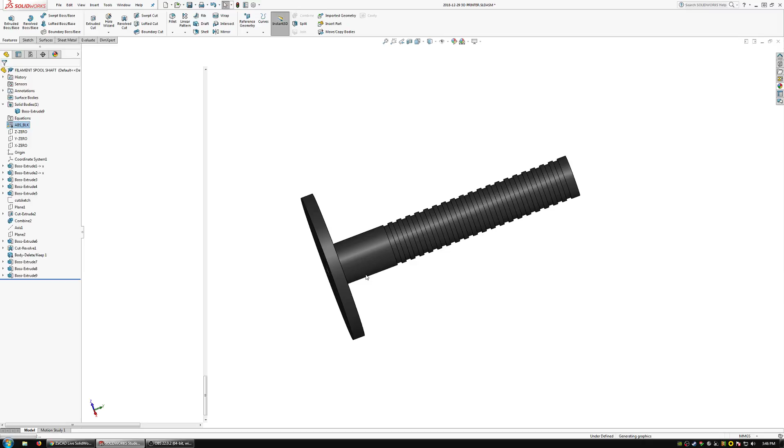Alright, so that is now set, and I'm going to make a subassembly out of these. That way I can just edit that without everything else getting in the way and slowing things down. I'll just start by fixing this, I guess. We already have quite a lot of mates going, but I'm going to try to mate everything to the screw, I think.

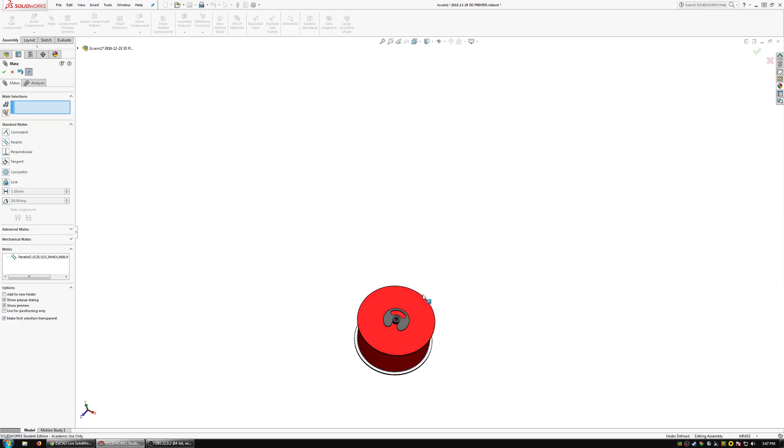That'll work for me. Actually I want to float that then, because I want Z0 to be parallel with that. And because I didn't mate that to the shaft of the screw, it stayed over there. So we can just go like that. And looks good.

Alright. Did I put an axis in this screw? I sure didn't. So actually I want that to be coincident with not Z0, with Y0, Y0, Z. I'll just mate the origins or the coordinate systems. There we go. That way my screw starts just where I want it to, and everything else can be easily built off of that. Beautiful.

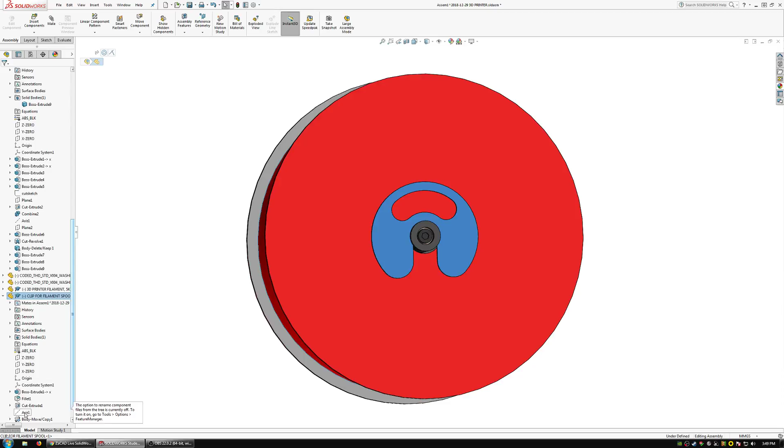So I want to make that with, suppose X0. I guess it doesn't really matter. I guess Y0 will be my bottom. Yeah, that sounds like a plan.

And it's going coincident, but that could cause it to overdefine by mistake later, so I'm just going to do a parallel. And again, Y with Y, parallel. And once more, that's fully defined, good deal.

These are not. Y with, actually I'm just going to mate it to the screw. That's preferable, actually. And this one as well. Y with the screw. It's already fully defined. Well, I was not trying to grab that one, but okay. Y with the screw. Okay.

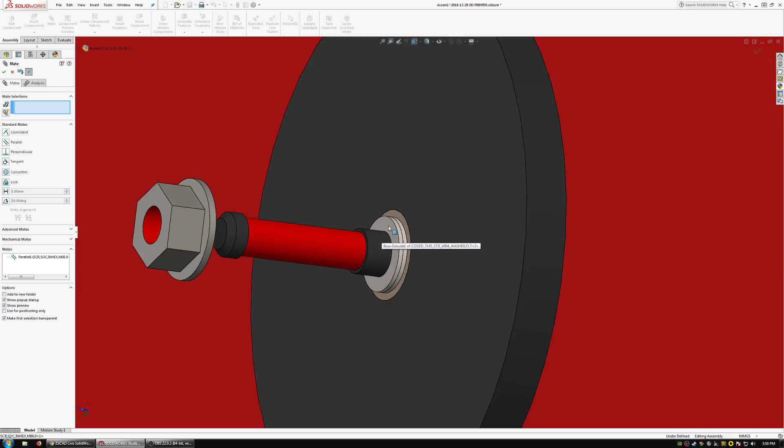And good deal. So now I think I've got a quarter inch worth of metal in between there. And we'll submit that. Okay, and are we fully defined? Underdefined with the bearings.

Yes, that would be a problem. I just like to fully define stuff because maybe that thing that isn't defined is something that's going to cause a relation or something driven off another part to be wrong, and it's just so much easier to fix the problem before it happens.

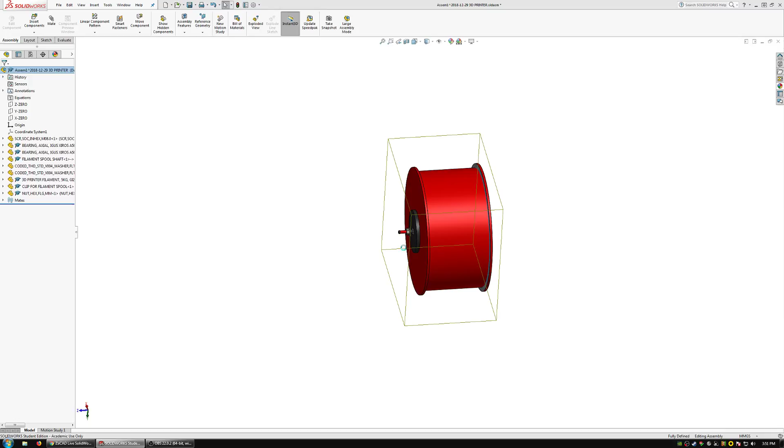Okay, so that looks pretty good, and I'm going to save this externally. Ooh, I still have something nasty in this old screw, don't I? No, that's fine. Is it in the nut? It is in the nut. So I want to remove all, and good.

And then, wait, 200 millimeters isn't long anymore? Okay. Save, save. Alright, so get that out of the way. If you look in there, that looks pretty good.

And yeah, I think I'm going to just try to do the exact same thing on all of them, all 6 spools.

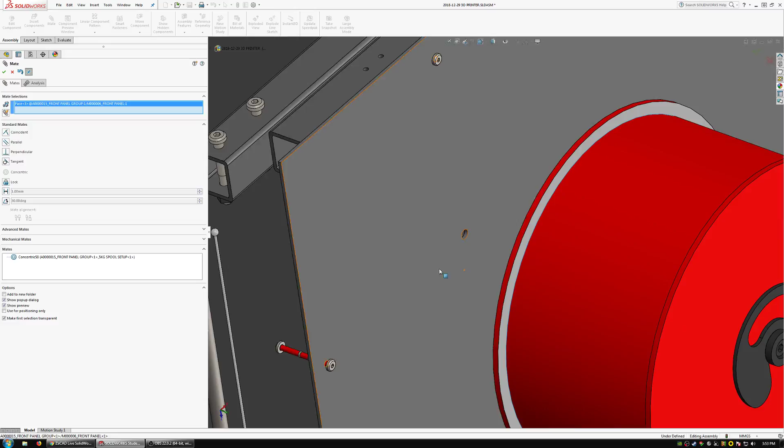So now that I've got the assembly, I can mate, and I can mate, and then last, I want the Y from that to be mated with something up there. Doesn't really matter, just so it looks nice.

Alright, and I can delete this folder too. Alright, so I can get rid of that, that, and that. Those are all just for ideas, and I don't need them anymore. Okay, wonderful.

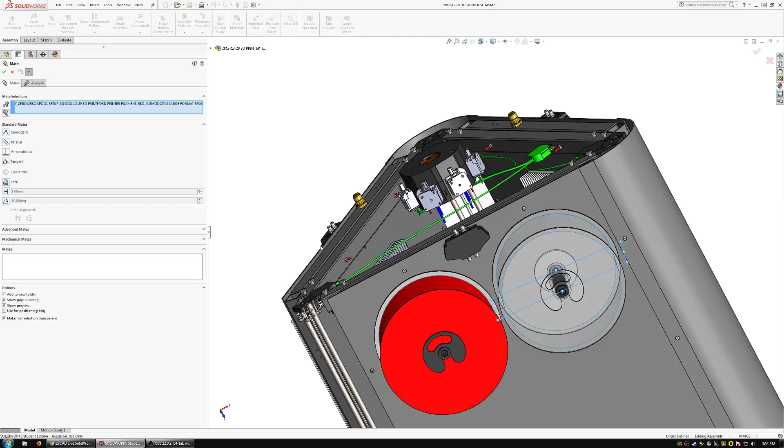So mount that up there. So much filament to be on this thing. I mean, 5 kilograms times 6. That's a lot of filament. Right, 30 kilograms. Yeah.

This plate might flex at 30 kilograms. I think it's only a quarter inch. I mean, it won't flex much, but yeah.